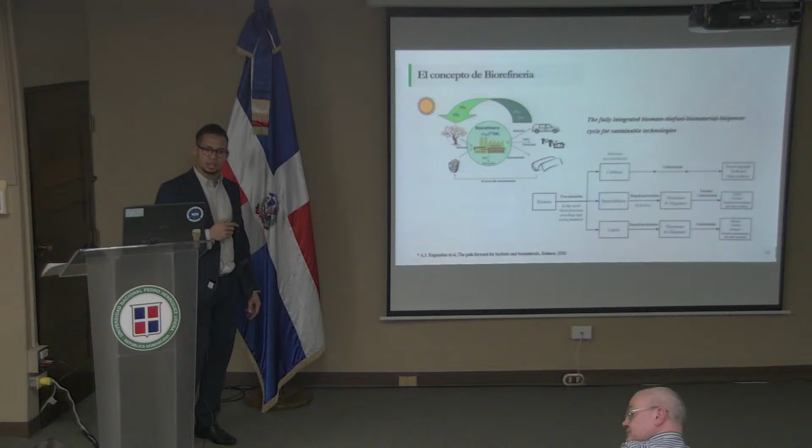Pero lo que sí es un hecho es que la contaminación que provoca esto está pasando. Por ese motivo los sectores industriales, academia e investigación están buscando formas de no ser tan dependientes de esta economía, de buscar alternativas para producir esos combustibles y materiales de la misma forma en que se producen a partir de recursos petroleros.

Un concepto muy interesante es el de biorefinería. Quizás algunos están familiarizados con él o no, el cual es análogo a lo que es la refinería de petróleo. Usted coge recursos, en este caso recursos naturales, los fracciona en sus componentes, y estos componentes son convertidos a productos de valor agregado y a combustibles. Es prácticamente análogo, es prácticamente lo mismo.

Ahora, ¿cuál es la mayor diferencia? Aquí hay un ejemplo de biorefinería, el sistema de pirólisis. Y solamente para resumir, esto es lo del concepto de biorefinería.

Antes de hablar cuál es la principal desventaja ahora mismo en la conversión de biomasa, vamos a hablar un poco en detalle de la biomasa y su composición. Quizá ya todos ustedes saben que la biomasa lignocelulósica está mayormente compuesta de celulosa. El porcentaje en el cual están presentes la lignina, la hemicelulosa y la celulosa varía según la fuente.

Pero tiene muchísimas ventajas, como son renovables, abundantes, no tóxicas, y los productos que se generan son biodegradables. Si se produce plástico a partir de aquí, será biodegradable. También hay un porcentaje de extractos, los cuales también tienen importantes aplicaciones.

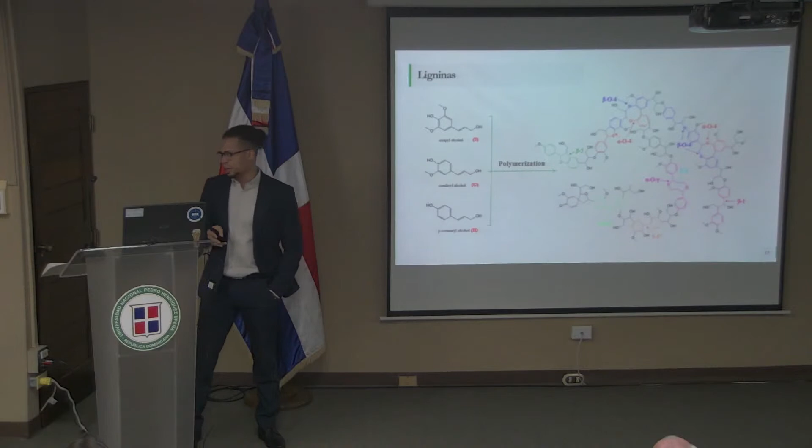Vamos a mirar uno por uno. Si se quiere valorizar lignina, lo primero con cada uno de ellos es la extracción, se deben extraer, pero después hay sucesivas etapas para obtener los monómeros. En el caso de la lignina es un polímero bastante grande, pero se han identificado varios monómeros, los cuales son principalmente alcoholes fenólicos.

El primer paso después de la extracción es depolimerizarla. Existen varias rutas para depolimerizarla. Y una vez que se obtienen estos tres monómeros, estos se pueden valorizar a productos de valor agregado o a combustibles y materiales.

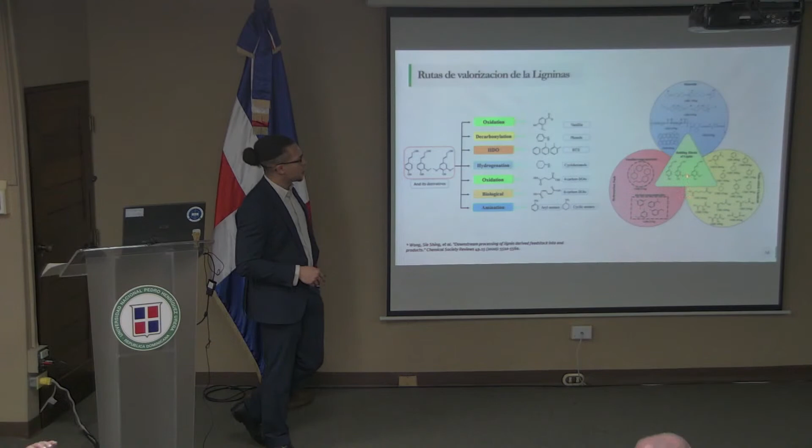Aquí pongo un ejemplo de las diferentes rutas a través de las cuales se pueden valorizar estos monómeros obtenidos a partir de lignina. Vemos algunas de las reacciones que se pueden realizar y algunos de los productos que se pueden obtener, los cuales están agrupados como materiales, combustibles, ya sea combustible de avión o moléculas tipo gasolina, y varios productos de valor agregado, ya sean productos químicos finos o productos con un mercado en específico.

Lo mismo va con la hemicelulosa. Aquí vemos que la hemicelulosa igual es un polímero, pero está compuesto principalmente de azúcares. Algunos de los azúcares que se pueden encontrar en la hemicelulosa. En este caso, lo primero sería extraerla de la biomasa, y luego de la extracción viene la depolimerización.

La depolimerización de este polímero permite encontrar azúcares como glucosa, manosa, galactosa y xilosa, y estos pueden ser convertidos igual a materiales y combustibles. Aquí vemos un pequeño esquema de cómo esto se hace: la hemicelulosa es convertida a estos azúcares mediante hidrólisis, la cual puede ser enzimática o ácida. Y algunas de las reacciones que se pueden realizar con estos azúcares para obtener diferentes productos de valor agregado.

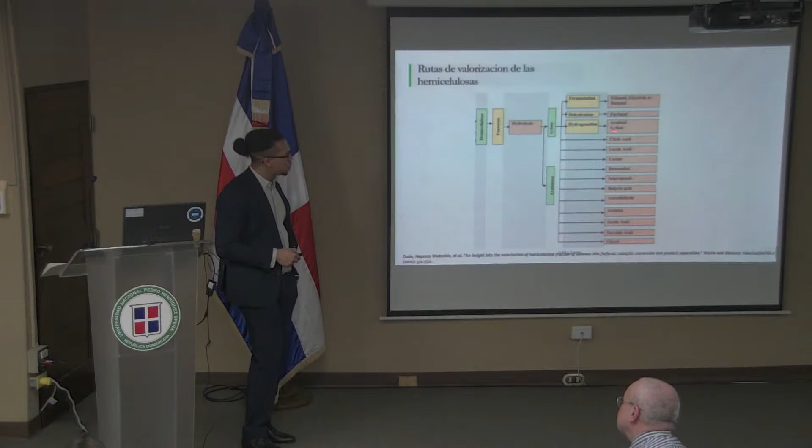Lo mismo con la celulosa, ustedes conocen la glucosa. Prácticamente la celulosa es glucosa, no más. Y lo mismo, hidrólisis primero, y luego de la hidrólisis, cuando se obtiene la glucosa, esto también se puede transformar mediante diferentes tipos de reacciones químicas a productos de valor agregado y combustible, los cuales tienen muchísimas aplicaciones en el área, por ejemplo, de la farmacéutica, de alimentos, etc.

También existen los extractos, los cuales son principalmente compuestos simples que se pueden extraer mediante extracciones con solventes. Por ejemplo, ácidos grasos, proteínas, pectinas, azúcares simples, compuestos fenólicos, etc. Y estos compuestos fenólicos, ácidos y también azúcares pueden ser valorizados de la misma manera como les estaba hablando de las diferentes fracciones de la biomasa.

Y si la biomasa es tan buena, si ustedes pueden hacer todo esto, ¿por qué no lo hacen? ¿Por qué todavía estamos haciéndolo con fuentes de petróleo? Bueno, el problema actual es que existen muchas limitantes. El principal de ellos es que los procesos son bien conocidos, cómo se hace, pero no son eficientes si se comparan con los procesos a partir de origen petrolero. Entonces, por eso es que hay un gran esfuerzo en investigación en esta área, porque se quiere mejorar todos esos procesos, hacerlos eficientes, y reducir esto.

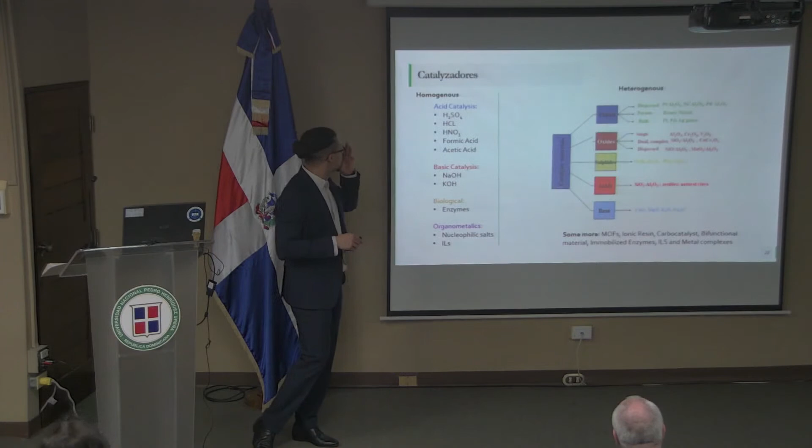Bueno, antes de seguir, quiero hablar sobre algo. No sé si estoy dirigiéndolo bien al público. Yo no, porque soy egresado de la UASD, no sé cómo ustedes están familiarizados con lo que es catálisis. Tranquilo, ellos son estudiantes, todo lo que se haga son estudiantes de ingeniería. Pero en la UASD, por ejemplo, cuando yo terminé mi carrera, escuché un poco de catalizadores, pero no sabía realmente qué era un catalizador, cuáles eran, cómo se clasificaban, cómo se veía uno. Yo nunca vi un catalizador, mi hermano, hasta después de terminar mi carrera. O sea, vine a ver un catalizador cuando empecé a trabajar en catálisis.

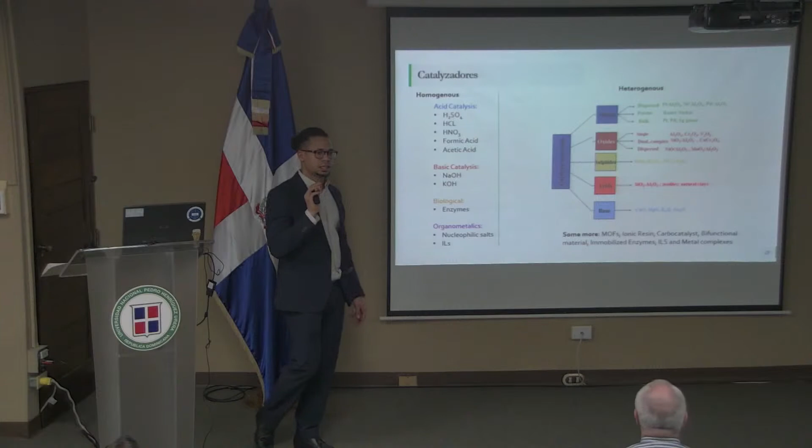Existen dos tipos de catálisis, homogénea y heterogénea. Esto yo creo que es conocimiento básico. Dentro de la homogénea vemos algunos tipos de catalizadores que se usan. Nuestro laboratorio está más enfocado en catálisis heterogénea, porque trae beneficios en los procesos de separación, hace las separaciones más fáciles y permite pasar a la operación continua de manera más fácil también.

Y así reducimos etapas también, mediante el uso de catalizadores heterogéneos. Ahora, si fuéramos a hablar de catalizadores heterogéneos, aquí vemos algunos de los clásicos en catálisis heterogénea, como son los metales, los óxidos, los sulfuros, catalizadores ácidos y básicos. Mayormente estos catalizadores heterogéneos son sólidos. Puede haber algún caso para otro tipo. Algunos un poco menos clásicos, menos convencionales, que son bastante investigados últimamente.

Tenemos las estructuras organometálicas, resinas iónicas, compuestos de carbono, materiales bifuncionales, y también existen técnicas para inmovilizar catalizadores homogéneos, por ejemplo, enzimas, líquidos iónicos y algunos complejos metálicos. Se pueden inmovilizar en sólidos y ahí usted tiene un catalizador que es prácticamente lo mismo que el homogéneo, pero en un sólido. Y ahí ya lo tiene heterogéneo.

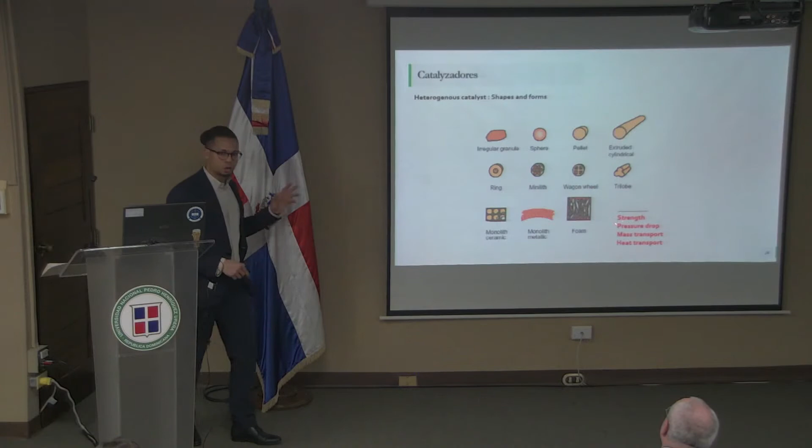Bueno, aquí vemos algunas de las formas en las que vienen los catalizadores. La forma confiere lo que es fuerza mecánica, las caídas de presión dentro de los reactores, y controla los procesos de transferencia de masa y de calor dentro de los reactores, dependiendo de la forma que tenga el catalizador.

Yo no sabía que los catalizadores se podían ver de todas estas formas cuando terminé mi carrera. Ahora, con el enfoque de la ingeniería de las reacciones químicas, cómo investigamos los procesos a partir de la biomasa utilizando catálisis, existen varios puntos. Si yo voy a investigar X o Y reacción de la biomasa, digamos que voy a investigar hidrogenación de azúcares, por decir algo.

Algunos de los puntos que investigamos, primero, está el tipo de reactor. Usted va a seleccionar qué tipo de reactor quiere, en qué tipo de reactor es más conveniente estudiar esta reacción. Eso va a depender de muchas cosas, de la velocidad de reacción, de qué catalizador, etcétera. Pero muchas veces ya tenemos conocimiento previo de estas reacciones o nos apoyamos en la literatura, porque los esfuerzos científicos se basan en esto. Hay muchísima literatura sobre un tema y usted no va a publicar lo que ya está publicado. Usted va a empezar de un punto siempre.

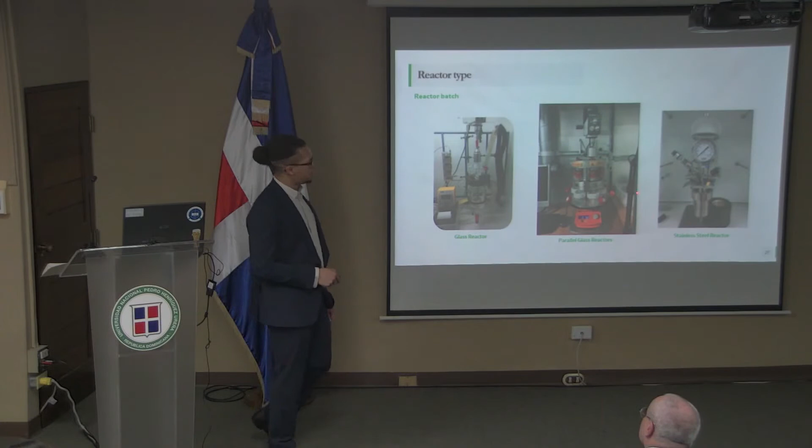Esto le permite a usted ahorrar tiempo, poner 6 catalizadores o 6 diferentes condiciones para estudiar equilibrio. Y bueno, tenemos los mismos reactores tipo batch, en este caso en acero inoxidable. Este tipo de reactor aguanta mayores temperaturas y mayores condiciones de presión. Aquí puede ir a presiones de, bueno, depende del proveedor, pero creo que son algunos 60-80 bares máximo.

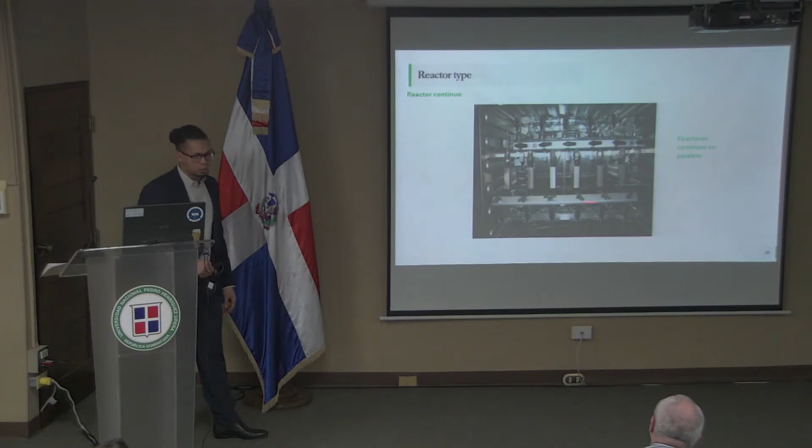También tenemos reactores en paralelo, en continuo, de la misma forma que teníamos en tipo batch. Y una tecnología un poco menos convencional, tenemos microreactores también, los cuales le permiten a usted estudiar las reacciones químicas en el régimen cinético, eliminando los fenómenos de transporte, y le permite tener una idea de cómo las reacciones pasan sin esos fenómenos.

Otras tecnologías no convencionales que utilizamos en nuestro laboratorio son reactores a microondas y reactores a ultrasonido.

Y bueno, hay que seleccionar el tipo de reactor y eso va a depender mucho de la reacción que se vaya a usar. Hay que saber qué tan rápida es la reacción. Si la reacción es muy lenta, es mejor utilizar un reactor tipo batch que uno continuo. Pero si la reacción es muy rápida, es mejor utilizar un tipo continuo. Y así, también se debería uno apoyar un poco en la literatura o en conocimiento previo para saber ese tipo de cosas.

Después de eso está la selección del catalizador. Todo buen catalizador tiene que tener tres condiciones básicas: tiene que ser activo, tiene que ser selectivo y tiene que ser estable. Activo quiere decir que sea capaz de operar en esta o en aquella reacción que yo quiero estudiar. Selectivo quiere decir que me permita obtener el producto que yo quiero en altas proporciones. Y estable quiere decir que yo puedo utilizarlo más de una vez sin que su tiempo de expiración llegue muy rápido.

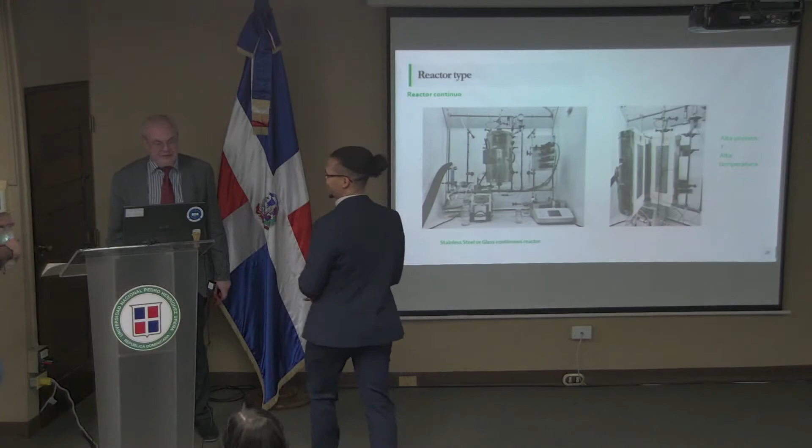10 minutes. No, we have many pictures and videos. Yeah, pictures to show that we came to work and not to relax. You mean that we stay here for photography now, like that? Next to the flag, so we can be seen.

It was interesting. I think it was good that people asked you all those questions here. They're insightful for the students, actually. Yeah. Should we place Madame the Dean in the middle? Yeah.

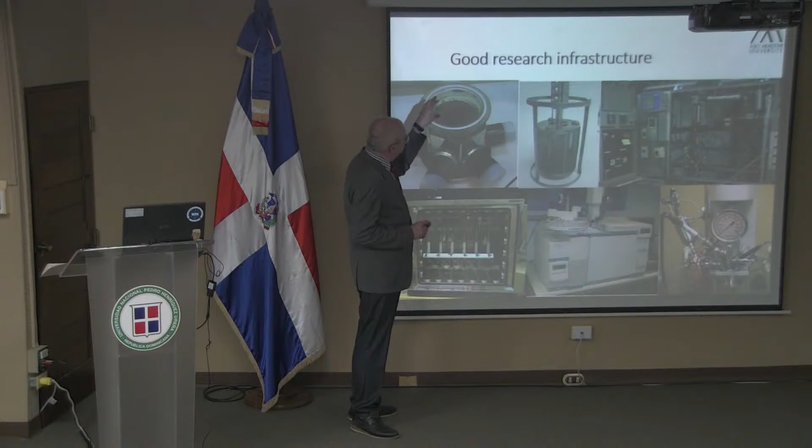Now we can go to the scientific topic towards new reactors and catalysts, where I try to explain in a methodological way what we are doing.

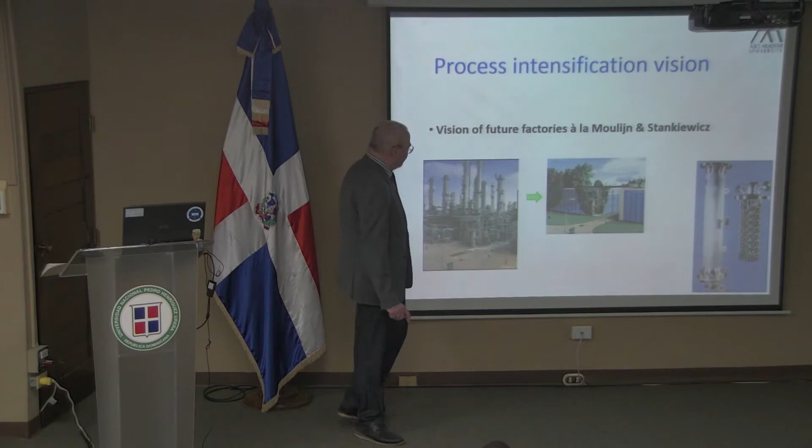But in future, if we manage to do process intensification, we can have much smaller factories and devices, and then one part of this industrial land can go back to people or even back to a natural state. Oh yeah, that is a dream.

But in any case, it has these different aspects, and we can separate two things: process intensification methods and process intensification equipment. Of course, there is interaction between these two. Wander showed things like ultrasound, microwave—these belong to methods. Intensification equipment is, for example, the microreactor, which Wander also showed here.

So there are numerous methods to do it; one must focus on something. We have ultrasound and microwave mainly. Then there are things like reaction and separation, such as reactive distillation. Then we have supercritical conditions, for example unsteady state operation. But bottom line, it's not about trying to make miracles—behind all this is the idea of enhancement of mass and heat transfer in one way or another.

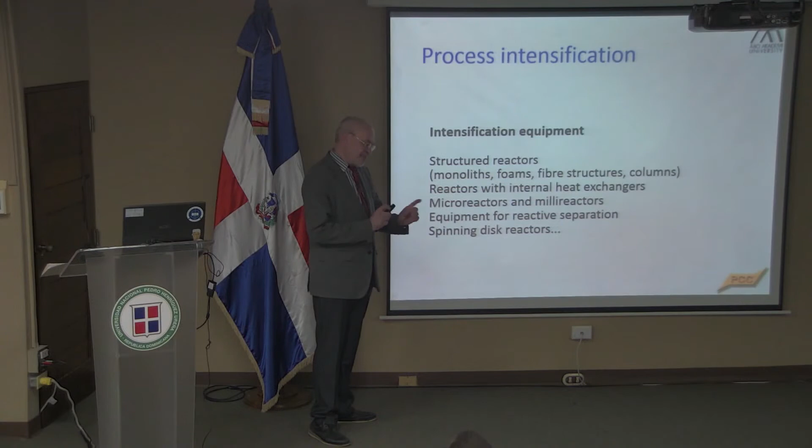Intensification equipment includes this monolith foam, which was shown here by my colleague, also micro and milliscale reactors—I will show more about them. And of course equipment for reactive separation, like reactive extraction, reactive distillation. So the method and the equipment are married with each other. So I will call it more like reaction intensification—one part of process intensification, focusing on chemical reactions and chemical reactor structures.

Now here we can have batch operation, we can have continuous operation—that's always the basis. But then the next step is of course to try to make it very efficient. Here, why do this in parallel? It's actually not necessarily process intensification, it's intensification of experimental work. You can put 6 different temperatures, or 6 different catalysts, or 6 different flow rates. Then you do much more experiments per day than with a normal device where you have only one tube.

This is handmade in our lab. Lavender had the picture of our very skillful laboratory manager, Dr. Kari Eränen, who constructed it after common discussions.

Catalysis—what is catalysis, and who was the father of catalysis? The father of catalysis was the world famous Swedish chemist, Jöns Jakob Berzelius.

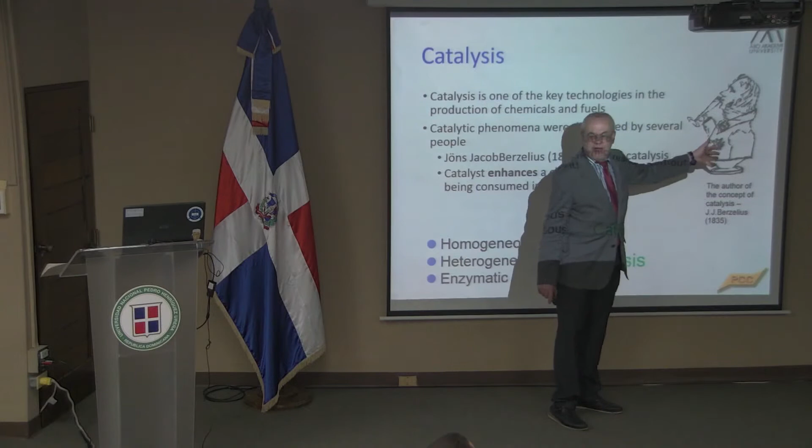Then you might ask, what is this? Berzelius was drawing a self-portrait after having some partying in Stockholm. So that is his picture of himself. You can go to Stockholm and find a park named after Berzelius. You just need the flight ticket.

Later on, people understood it more deeply, that we have homogeneous, heterogeneous, and enzymatic catalysis. That definition was more or less given first by the famous chemist Wilhelm Ostwald.

New catalyst forms: monoliths, like for cleaning exhaust gas from cars, but also industrial applications like oxidation reactions, microreactors, fiber, cloths, solid foams. I will tell a little bit about all this now in this lecture.

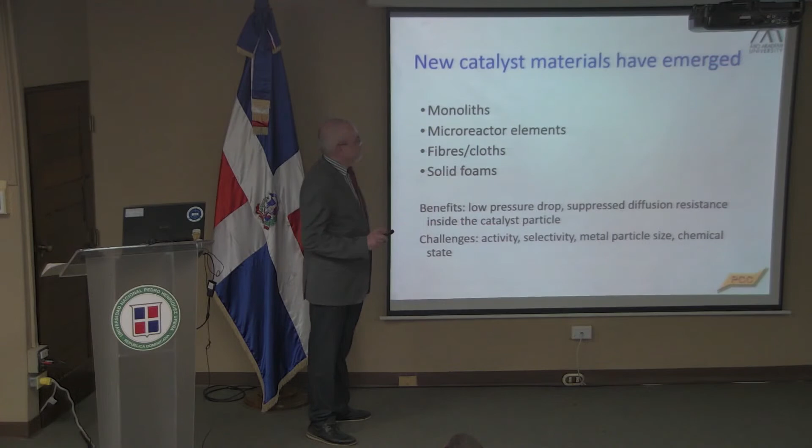Katapak. If you want to lose your money, you order a Katapak. It's made in Switzerland. What is the idea?

It's a network, a very nice network. You send your catalyst there - you can even prepare it yourself - and they put the small particles inside the network here, and then they are immobilized. Then the gas and liquid can penetrate into the network, and in that way you have an efficient reactor and a static mixer.

Monoliths, I think, are probably known to many of you. They can be metallic or ceramic, with channels of a few millimeters. Here is the material, here is the porous support, and then the active metal spots are in the pores, and there, hopefully, the reaction is happening.

This is a marvelous example of Finnish handicraft, knitting, from the Tampere University of Technology - a silica fiber that can be immersed in a metal ion solution, and you can get platinum on it. It's a structured catalyst.

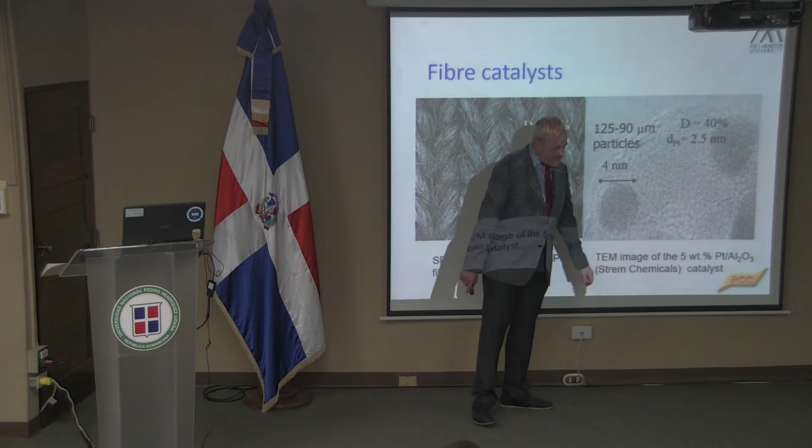Then you need to run to a microscope. Transmission electron microscopy can give a picture of things on the nanoscale. So here the metal spots are approximately 4 nanometers. That can be critical, particularly for one metal - gold must have very small spots, like 2 nanometers or a little more, to be active. If they are very big, then it's inactive. But also for different other metals, it's important to know this particle size in order to optimize the conditions.

Now here you have again this nice fiber in a scanning electron microscope. It's a good support material, but it is a little bit weak. What is the English word? Brittle. You can crush it by hand, and that's not very good.

Now let's go a little bit into the theory. Very many processes are three-phase - you have gas, liquid, and solid catalyst. For example, with sweeteners like xylitol and sorbitol, you have the sugar solution in water, you have hydrogen, and you have the solid catalyst, ruthenium or nickel. So you inevitably have three phases.

Then you have the solubility and mass transfer - gas to liquid, liquid to solid, and mass transfer and reaction inside the particles. So this is a lovely case, a dream for a chemical engineer who wants to do modeling. You must model this one, and this one, and this one, and then put all these sub-models into the model of the reactor concerning the flow pattern and energy balance.

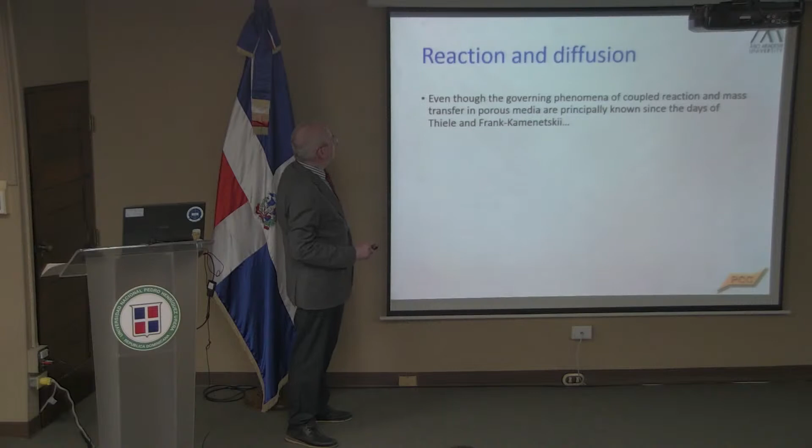Reaction and diffusion in porous catalyst particles is principally known because before World War II, in 1939, Thiele from Northwestern University, United States, published what is called the Thiele modulus, giving the ratio between the rate constant and diffusion coefficient. But this concept is not that much used for complex organic systems, for example in biomass transformation, yet. So the basics, the first order reactions, are present in standard literature, but that's not enough. One needs also to go further.

Who was Biot? He was a French physicist who made a theory between the external and internal mass transfer, roughly speaking. He was an expert on heat transfer, and then mass transfer is similar.

Without going deeply into the background, what do we have for a porous catalyst particle as a mass balance? We have the chemical reaction rate and the diffusion rate, which are interplaying, because the molecules must go from the film outside the particle to the outer surface of the particle and diffuse there in the pores, adsorb on the surface, react on the surface, go out from the surface, diffuse out through the pores and to the film. That's the path.

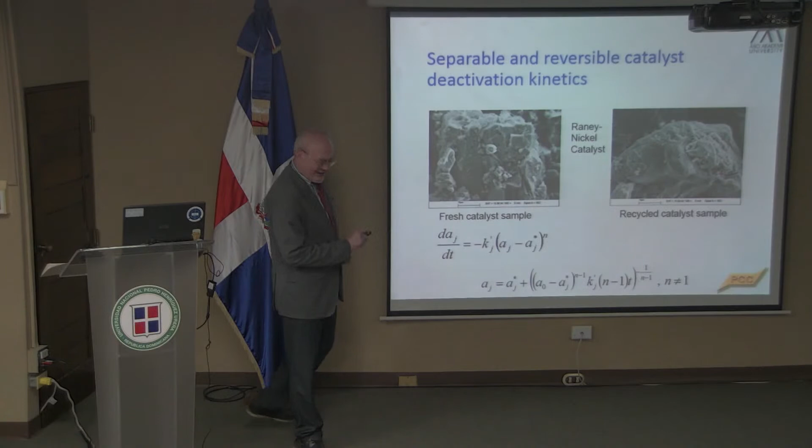So by solving this with software, which my colleague mentioned, like MATLAB or gPROMS, we get the concentration profile inside the particle, inside the pores. There is only one problem: we need to know quite many parameters.

Then there are some other things. If we do it in the batch reactor, this is the balance: transport to the particle and transport from the gas phase—for example, if you have hydrogen, you need this. And then gas-liquid flux can be described with the classical two-film model. I won't go into the details—it's just proportional to the difference in gas phase concentration and liquid phase concentration.

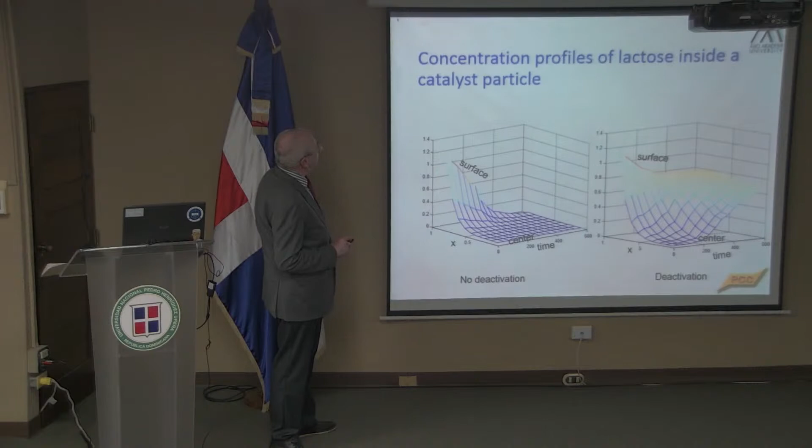So this type of simulation is not used only like art pour l'art to make nice publications and get fantastic doctoral theses. They can be used for design of catalyst particles in industrial scale, and they can give an indication of whether we need this modern structured catalyst, or can we survive with classical pellets. You can convince other people by doing these three-dimensional pictures of the same thing, but it's actually the same issue as the previous picture. That's the point.

Now, continuous reactors: of course, industry typically has the dream of continuous operation, particularly in bulk chemicals and oil refining, etc. So then we have the workhorse, which is the trickle bed reactor, where we have the downflow of the liquid and gas, and the particles are there. And why is it called trickle flow? Trickle is a verb in the English language, which means some kind of dropping down.

I was at a conference where an American professor had put a microphone in the reactor. He could hear that it was trickling. It was like bloop, bloop, bloop, like this. Yeah. Now, this is of course clear what we have there.

Something is in the gas phase, something is in the liquid phase. We have the diffusion effects, we have everything I showed in the principal pictures. So this is in principle very, very demanding to model. Not necessarily on the level of equations, they are quite well known, but really to implement it and to have reasonable values for all the parameters. So we are back to this picture.

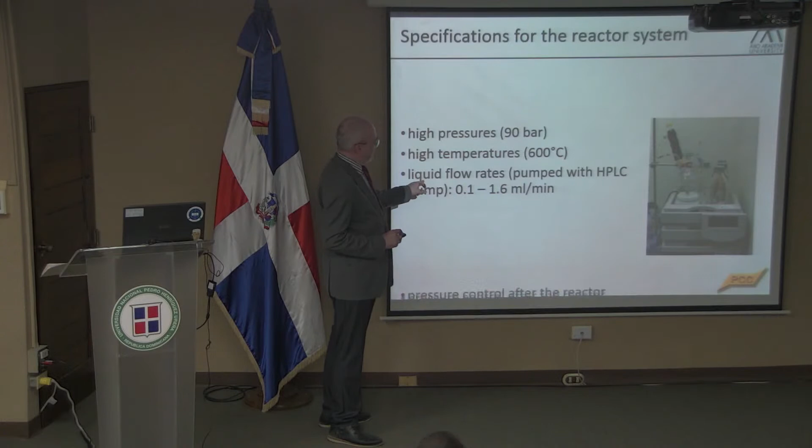This is the basic unit, one reactor here. You see, the catalyst is there, and this is a heating block of aluminum outside it. So we can have different temperatures in different parallel reactors. It can go to rather high pressures and high temperatures for catalyst pre-treatment, and we can adjust the pumping rate. So this is just a technical summary. And we can screen catalysts and temperatures in parallel. We can also look at catalyst deactivation.

Here is an example of this citral. The catalyst is nickel on silica. Nothing special, the temperature is quite low, the pressure is also moderate. Yeah, just go ahead and do it. Here is the full scheme. But on nickel, it goes this path to citronellal and citronellol.

Yes. What can we see? That if we had the same pumping rate in all parallel reactors, we should get more or less the same result. So this should be 1 point, 1 point, and 1 point. Yeah, it is within reasonable scattering. But what you see is that with time on stream, the tendency goes down. That means conversion is going down, so the catalyst is deactivated.

So we can directly see it like catalyst activity testing. And that is of course something industry is doing very much. When they screen new catalysts, they must see how long it resists, how often it must be changed or regenerated, etc.

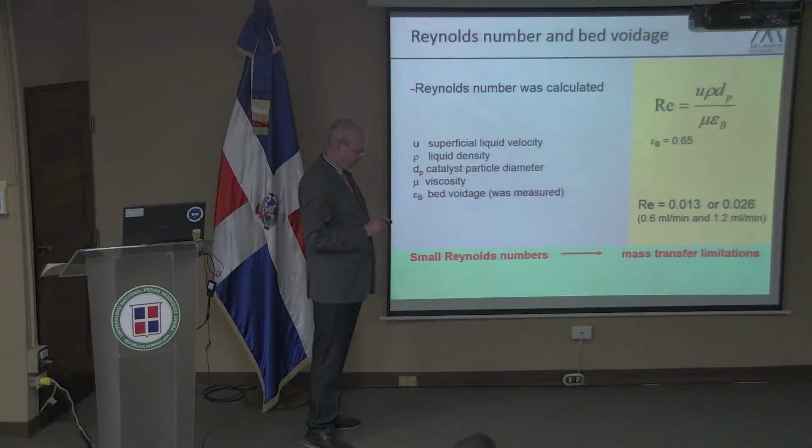Now we come to chemical engineering again, and we must evaluate the Reynolds number here, and you might be surprised. But in this type of system, for this reaction, we must have a low flow rate. So Reynolds is really, very, very low. Then residence time, of course, affects it. If we have a shorter residence time, then we have lower conversion. It's illustrated here. That's nothing surprising, but it shows that we can also check this quickly.

I'll take the next picture, which is more important. I was talking about diffusion in the pores. We tried 2 catalyst particle sizes. We put in big particles, in a relative sense, and we have low conversion because of diffusion resistance. We put in smaller particles, and we have much better conversion. That means we can directly study the catalyst effectiveness as a function of particle size in this device. You can of course compute a lot, but it's always better to also have some experimental evidence and verification.

So I would say that this is successful, but what we learned is that we should have longer reactors, because many reactions are slow, so that we can have a higher flow rate, also to suppress the external mass transfer resistance. And we can prove the diffusion resistance, we can see the effect of residence time, particle size, temperature, activity changes, so it's a very practical tool.

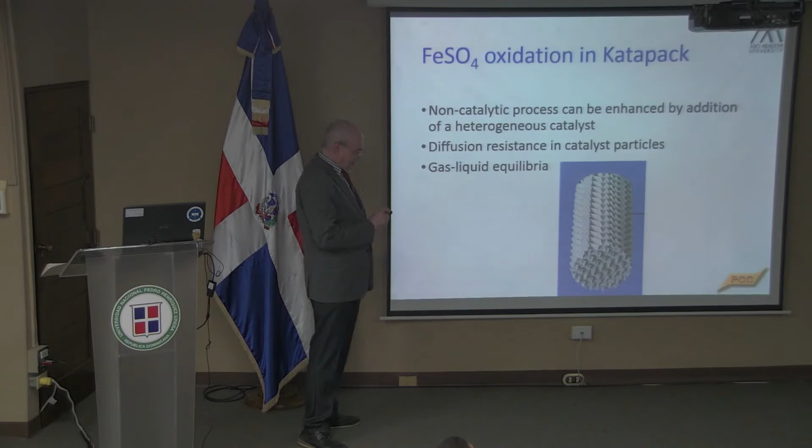And then the company who paid it bought this Sulzer and made pilot test. Non-catalytic rate, there is mechanism behind, but you see it's proportional to ferrum ions here. Close to second order, a little bit less. Catalytic one, a complex surface reaction mechanism, and the reaction order was practically first order with ferrum, but 1/2 for oxygen.

There is of course a lot of work behind this to do experiments and modeling, regression analysis like my colleague told, to get these parameters. But then we have a nice possibility to simulate and compare with oxidation experiments. So this is batch reactor experiments actually, or actually semi-batch, so that we have the oxygen concentration constant, and we do at different temperatures. Lines are by simulation reasonable. And then also here we could show that catalyst particles have diffusion resistance. So we should not have too big catalyst particles there.

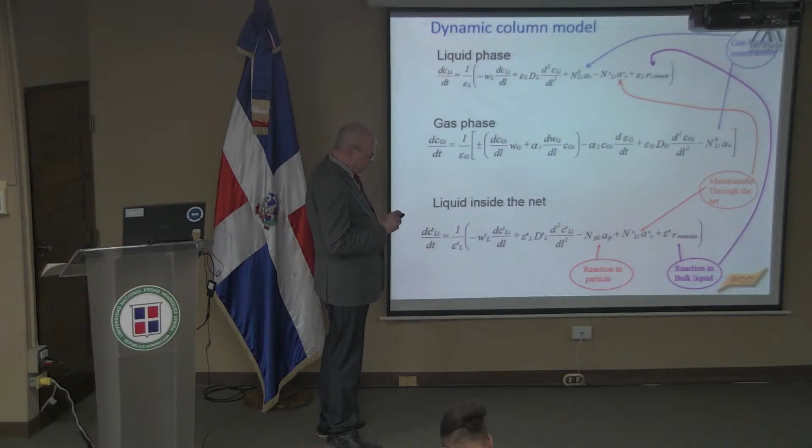Okay, then we go to the more advanced model to describe this Katapack column, where we have the particles inside and we have mass transfer between gas and liquid, like indicated here. We have mass transfer inside the net system. We need the liquid phase balance, gas phase balance and liquid phase balance inside the net. So this is bottom line what we have and can be put there.

And then it was built like a recycling system, a column reactor with the catalyst and recycling the liquid like this, in the company Kemira, which is making water treatment chemicals, and we could make an independent simulation and verify with our model in the lab scale that it can describe the behavior of the pilot reactor like this. The concentration of ferrum iron 2 goes down and builds iron 3. And then we have this concentration pattern in the system, profiles inside the reactor as a function of time.

So it goes. I would say that this is a rather successful work, and I think one can learn something as a project how it could be put up. We have the non-catalytic experiments with only oxygen or only air, and we have the model of the non-catalytic kinetics. We have the catalytic experiments where we must combine the non-catalytic model with a catalytic model to a comprehensive kinetic model having both elements.

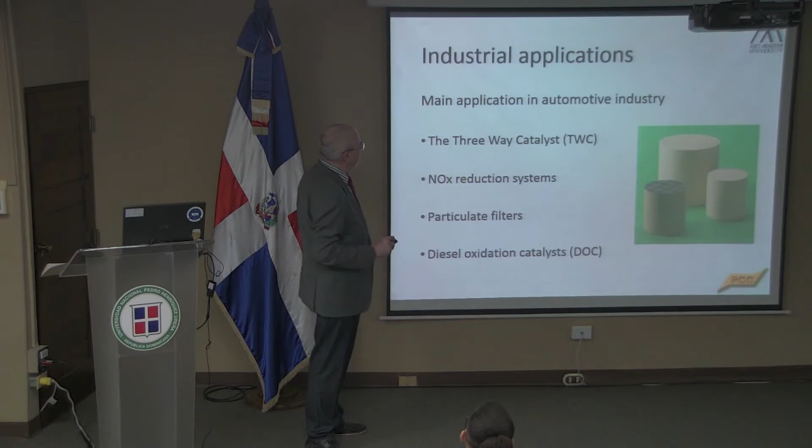Yeah, but also it can be used for NOx reduction, and it can be used, for example, in destruction of volatile organic components which appear like in paint industry and here and there. You cannot let them slip in the atmosphere. It can also be used successfully, metallic monolith, if you have highly exothermic reaction. You avoid the hotspot, you keep better the temperature under control. So here is like stationary emission control, where you put the monolith layers on top of each other.

Yeah, here are potential reactions where I think one would really have a benefit. Hydrogenation of nitrobenzene, for example, is heavily exothermic. Also, oxidation of orthoxylene to get phthalic anhydride. These type of partial oxidations, which are heavily exothermic and dangerous ones, would better be performed on monolith. Now, why then not use it? Yeah, monolith is more expensive than catalyst particles.

I had a project together with the famous Danish company who is doing a lot of catalyst technology. I proposed monolith. It would have been good for that application from chemical and technical viewpoint. They said, no, Tapio, we don't put monolith. I said, why? We want to have such a catalyst that we can throw it into the reactor. Monolith you must put nicely there. Yeah, no.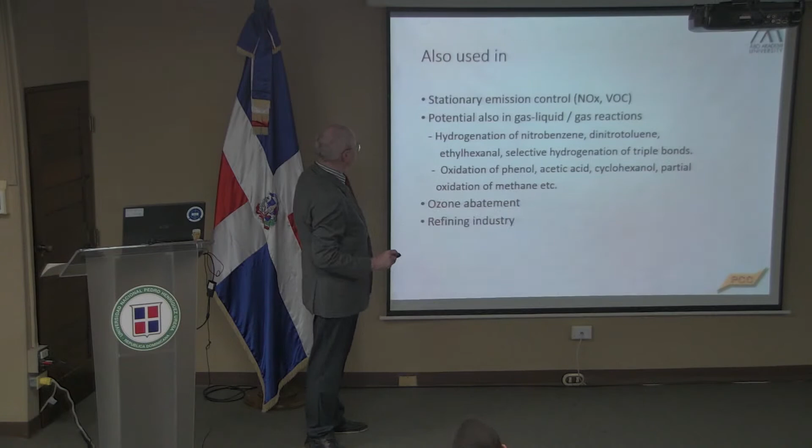Let's go further. This is just a list of potential applications. Work is going on here and there. But why to use them? Low pressure drop. Catalyst is fixed in its place. We can have large geometrical surface area. And we can tailor the detailed design.

One can also say easy scale up, in the sense that when we have a small scale monolith, we have exactly the same catalyst there, same catalyst layer, etc. We have short diffusion path, so you don't typically need this model of reaction diffusion. You can try to operate in the regime of kinetic control. For three-phase systems, there is still very little experience, and there the challenge is to distribute gas and liquid in larger monoliths in an even way.

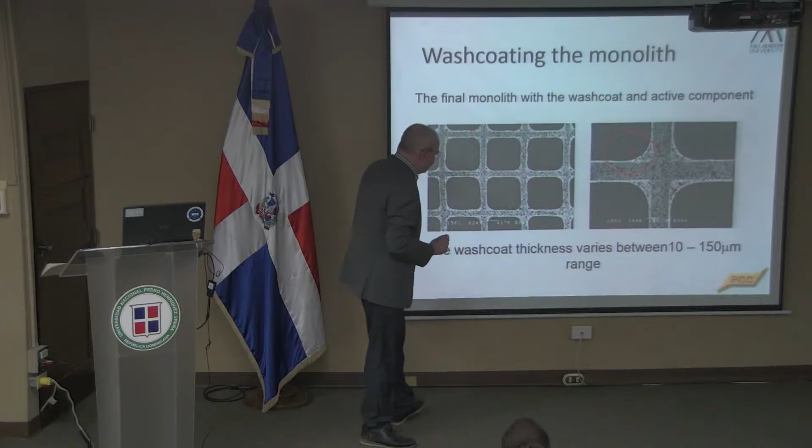I think I could jump over this preparation technology. I will leave the slides here so you can study them in peace, but bottom line, if you have the support material there, then you can make the active component there by impregnation of a metal salt. That's the key point. It's a wash coating method. The result will be this type of nice wash coat, but you see, it is difficult to have it completely even. Typically here in the corner you have more wash coat, you have thicker catalyst amount. So that's of course a tricky issue in practical work.

Here I have the example of the metal monolith which you roll like that, and then you have a very nice and compact structure and very good mechanical strength. So we can go further to solid foams. This is ceramic foam, and why use it? We can randomize the liquid and gas flow. In a monolith, there's the risk that it's not distributed evenly when you have a larger monolith. But here we can hope that when we have a dispersion of gas and liquid and we push it in, it's randomized in the structure.

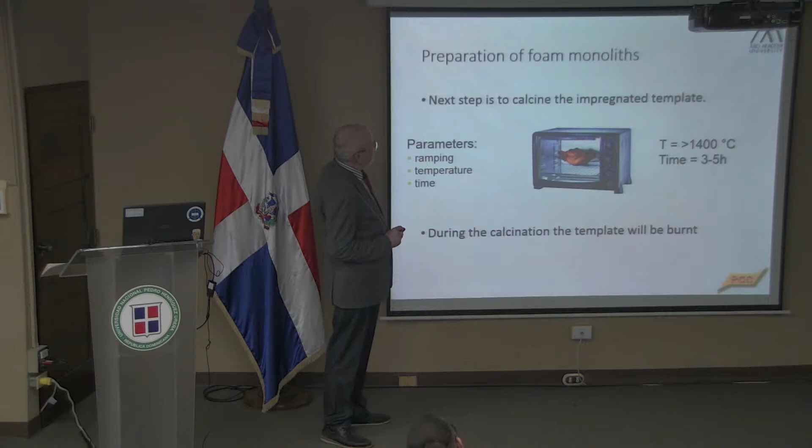Here, the preparation is you have polyurethane, for example, as a template, and then you put the inorganic component there and you burn away this polyurethane. So then you get a replica, which I showed in the picture here. And then you can play with the different components here, what you want to put. The whole idea is of course the dipping, but we can take advantage of all the previous preparation of different catalyst materials, because chemically it's the same as traditional catalyst powder. Then there must often be some calcination in an oven or with microwaves. Different possibilities exist.

Foam monoliths here of ceramic structure, then you must go to the scanning electron microscope to see the whole system and the channels there. The real size of these pieces is approximately like my finger. Then you go to some expert who can do this tomographic investigation. We collaborate with the Helmholtz Zentrum in Dresden-Rossendorf in Germany, and there is an expert who can look at the monoliths and make these nice pictures, and also study the flow into the monolith. But then we also need a very classical determination of residence time distribution through this system.

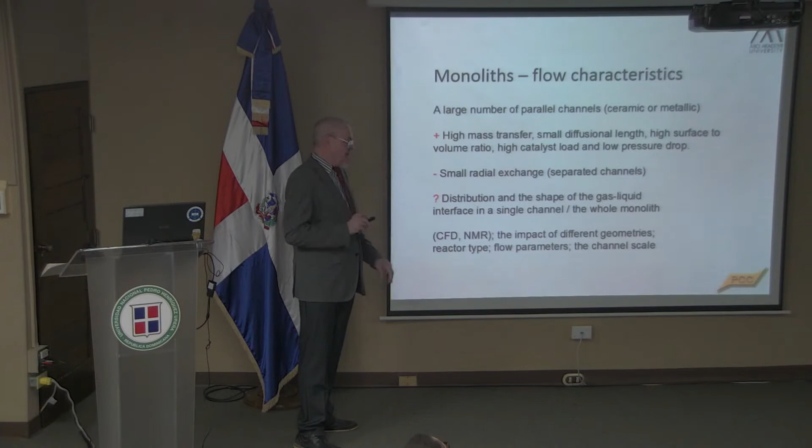Yes, I think this all is something which must be done, and there is no shortcut. All these studies are very useful, and they are important when we try to shift to a new technology. High mass transfer, short diffusion length, high surface to volume ratio, low pressure drop are great benefits. Distribution of the gas and liquid is the challenge, and of course this is typically a more expensive catalyst. So if you have catalyst deactivation, there is the risk that you must throw away the monolith and then have a new monolith.

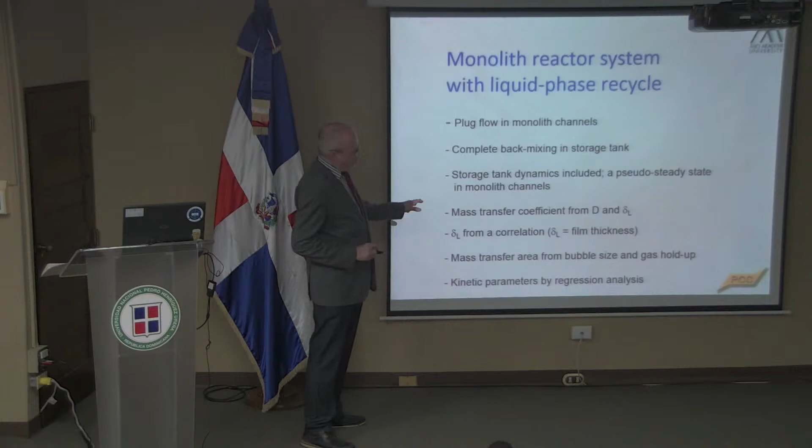And we assumed the flow to be simple. The storage tank was a completely mixed reactor, continuous tank reactor. Then we could calculate the layer thickness there, the film thickness around the particle, from correlations in literature. A lot of pioneering work on three-phase monoliths was done in Gothenburg, Göteborg in Sweden, and then later on in Delft. So we could utilize this information and methodological research made by our colleagues in Sweden and in the Netherlands.

Yeah, I think I can conclude here that this mass transfer resistance requires a lot of consideration. Optimization of reaction conditions is very crucial for everything. We would need more applications, particularly for fine and specialty chemicals, also in biomass. Nowadays, the loop reactor concept can be used by recycling to get higher conversion. Rotating monoliths are used in stirred tanks in laboratory scale.

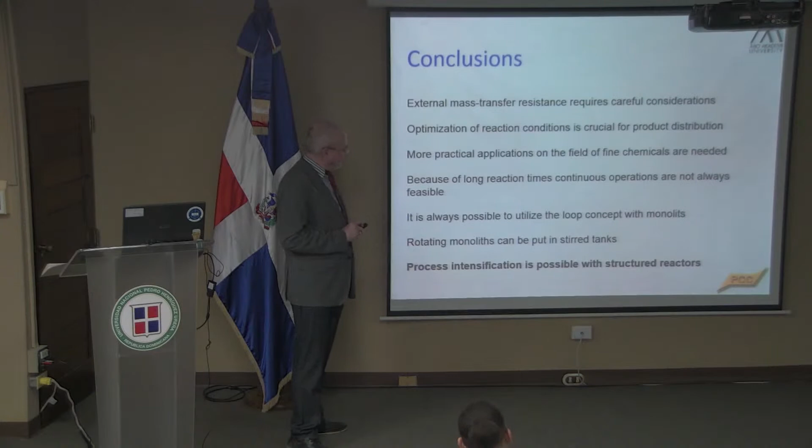In general, different types of process intensification are possible with structured reactors, but one should always have a sound, how to say, comparison and research strategy, which I present here. The basis is the kinetic investigation, knowledge of the physical properties. This gives the model for intrinsic kinetics I have shown. We get a model for catalyst layers by combining intrinsic kinetics and a diffusion model, and then we can try to decide after experiments and simulation, should we have a classical slurry reactor, or a classical fixed bed, trickle bed, or a structured reactor like monolith, solid foam, fiber, whatever.

Should we take a break or should we continue directly? But actually, I don't have that much left. We could continue until the bitter end.

Yeah, because this is something newer, avant-garde again. A variable area bubble column reactor, where we have a PhD student now, Ananias Medina, but before him the project was prepared by some people. Former PhD student Cesar de Araujo Filho studied the classical bubble column reactor. Javier Ibanez Abad came from Spain and made a postdoc study of this one.

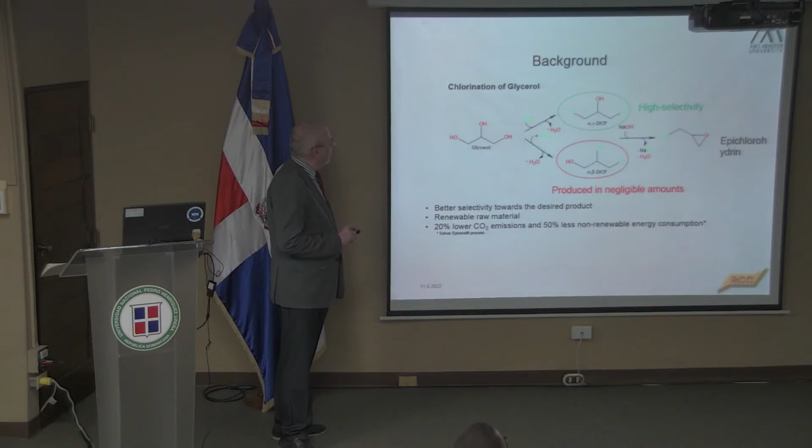So, let's go further now. Background is this, then, that we get first the monochlorinated product, which gives the two dichlorinated products. But if it's this one, which is chlorinated, this beta component cannot react further. Main path is here. Goes here, monochlorinated and alpha gamma. And you see, catalyst is simple, it's acetic acid. HCl is simple. Everything is principally simple, but we must get it reacting and we must understand the reaction mechanism.

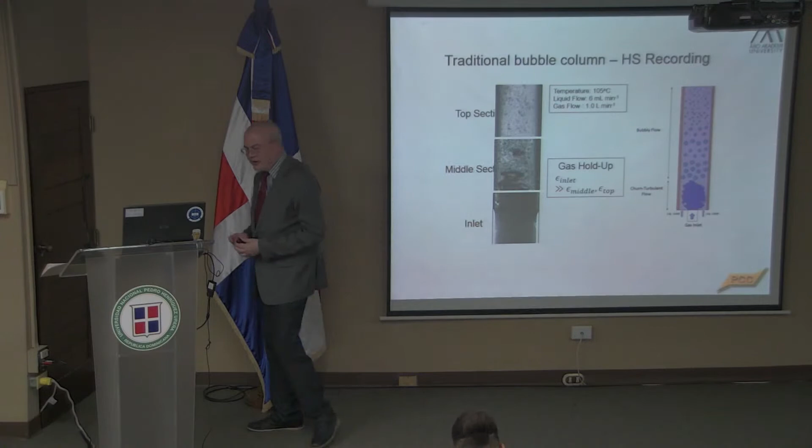Okay, but let's try to go now to a traditional bubble column reactor. We have a high-speed camera, and in the inlet it's like that. Then the hydrogen chloride bubbles coalesce, but then hydrogen chloride is consumed. So in the top section we have again a different flow pattern. Quite interesting. We have different flow patterns in different parts of this system. Then we need traditional residence time distribution. We put an inert molecule there, a pulse, and we see how it comes out. If this is very narrow, we have Dirac's delta function and plug flow, piston flow, but here we have a broadening. So we have some back mixing in the system. Yes.

Variable column reactor. Why? Because we want to have segments here to promote plug flow to get better performance. Because in a traditional bubble column there is quite a lot of back mixing, which is not good for this type of reaction. So here are some experiments. Residence time distribution is here, and then here is the fit of the model to the experimental data by Javier Ibanez. The same picture more or less repeated. Yeah, it works.

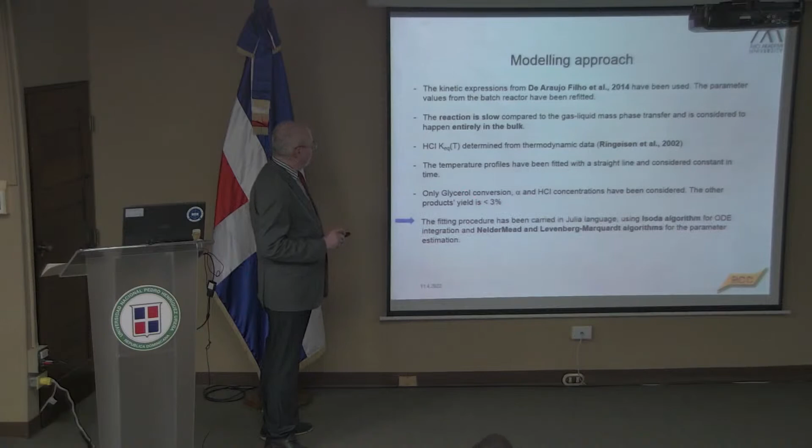And then we need the kinetic expressions from previous work. We have data about the phase equilibrium of HCl, and then we utilize the experimentally determined temperature profiles. And then the Julia language was used for parameter estimation. Here you see the model is the so-called dynamic time-dependent axial dispersion model: plug flow, axial dispersion, gas-liquid mass transfer, and reaction. The rest are smaller details. So, discretization of the partial differential equations in the length coordinate, then we have a system of time-dependent ordinary differential equations, and we fit some of the parameters by minimizing the difference between the experimental and the predicted concentrations. Oh, now it is overlapping.

Yeah, and you see it's quite a good description, reasonable description. Now we are improving it because we noticed also a little bit more temperature change in the system, so that had to be included in more detail. But so it goes, and we can be rather satisfied with this application of all the central reaction engineering principles for this complex system.

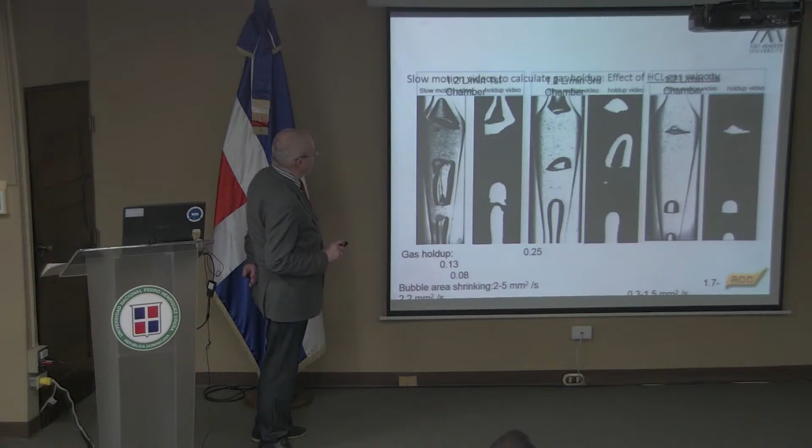Let's see. Here you can see, enjoy the show. Yeah. Bubbles are rising. One of my colleagues from Switzerland, who is more in classical reaction engineering, is not that fond of fluid dynamics. He told me, Tapio, it is not enough that bubbles are rising, but I think they must rise here because these hydrogen chloride bubbles must react with the component to make the product. Yeah. Can I do it now? All things are rising here. Hopefully I can go out from this.

Yes, good. So the Péclet numbers are clearly higher when we have this variable diameter reactor. That is the good point. And we could also see the preliminary fitting is quite good, and the high-speed camera gave us nice pictures. One can go very deeply here into the theory of fluid dynamics principally. But I think the most important thing is the intensification factor. We get much better results with this type of device compared with the classical one.

Then I go to something nice and simple and beautiful - it's the next step when we make this epichlorohydrin. Suyana Heredia, a lady from Ecuador and Spain, came to me and asked, Tapio, do you have some simple and nice project to do that I have time for?

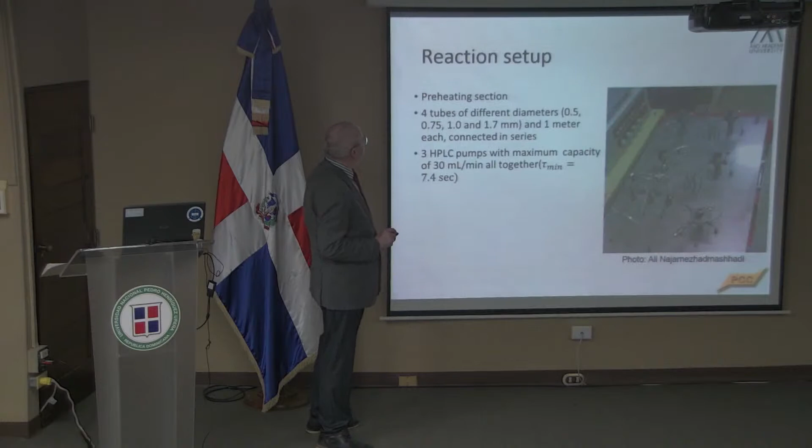There are different sampling valves after each coil, and temperature is measured in different places. This picture was taken by Ali Najarnezhadmashhadi, who came from Iran and made the residence time distribution studies here. In this picture you can see the coils which are in series, and the liquid is flowing through all of them. We have a better picture here.

Now we go further. We have this issue of glycerol, which I showed in the previous example, and then we made this chlorination, as I showed you, and then we make this epichlorohydrin. First step is reaction of this chlorinated product with the alkali. We get the intermediate which reacts, forming the final product. The global reaction is a simple one - simple on paper.

One can apply different theories. I can think that the first step is rapid because it's only a proton shift. Then I come to this rate equation, which actually was sufficient for the system. Quasi-steady state means that this intermediate is in steady state. These are details - we can go further, and it turned out that in both cases we can simplify it to a second order kinetics.

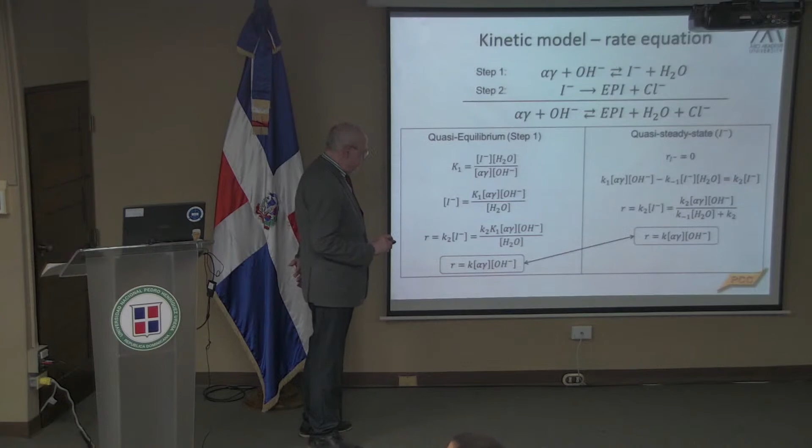So then it's like classical standard work in the sense of chemical kinetics. Analytics was a big challenge because we had to take offline analysis and quench the reaction by dilution and cooling. My colleagues were close to depression there, but I managed to keep the good spirit and say try tomorrow again with a little different recipe. And they tried and tried.

And it was fantastic - only quite few experiments, not very many, varying temperature and the ratio between the reacting components. That's it, the model is very simple: plug flow model, second order kinetics, and temperature dependence like Arrhenius law. And we have a lot of data because after each coil a sample was taken, so we had the profile of the component inside this millireactor system. This was minimized - experimental concentrations and those from this model.

Soon we see the results. Look, think what is the reaction time - 5 seconds, 10 seconds, 15 seconds. You can never do this in a batch reactor, because if you take a sample everything has already gone, everything has reacted. You must have a continuous reactor, because this is the residence time - residence time is volume divided by flow rate. So we can measure the kinetics of a very rapid reaction with high precision using this device.

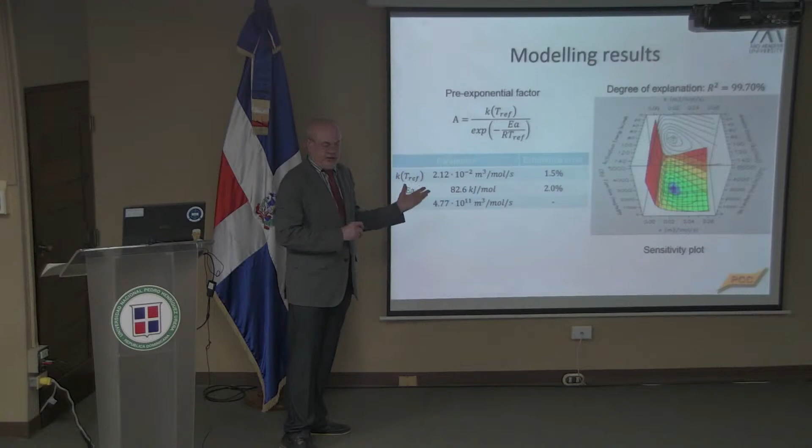So this is an example of how millireactors can be extremely efficient, and you don't need very sophisticated technique for them - you need coils, you need some valves, that's it. It was a success, and I was happy, and Sujana was happy. It was published in Chemical Engineering Science a few years ago.

I go to the last part now, microreactors. Why go to microreactors? What microreactors are - at least one inner dimension is in micrometer scale. High heat transfer rate possible, short diffusion resistance, short distance possible, and safety. But for me and our lab, in an academic environment, it's very efficient for investigation of kinetics and different catalysts.

Here we have the channels. I will show, after this marketing slide, some of the devices. Here are some disadvantages mentioned - cumbersome coating of the catalyst can be a disadvantage, but that can be solved either by hiring an internship student, PhD student, or using robotics. What else? Price of the material, of course, but I think 3D printing will put the price down because then we can more easily print different structures.

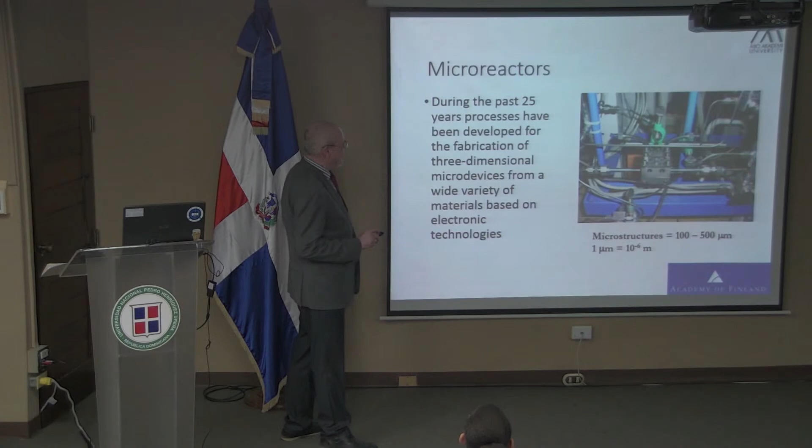Those with good eyes can see IMM, Institut für Mikrotechnik Mainz, from Germany. They provide this housing, and then they send an invoice. So you can use your money by buying these types of elements.

But you see, this is the principle. These channels must be made by some mechanical method, some etching, laser, different ways. I think when this microtechnology was started, it was very much the mechanical way they made these channels.

Then you must wash coat it with some anodic oxidation, something, put for example an alumina layer if needed, and then you impregnate with catalyst. So it has quite many steps, but the bottom line, we start from here, because this part has not really novelty in making the channels. There are better people who do it. The chemical and chemical engineering knowledge is here.

Here we have a simple example. Jose Hernandez put some plates here, and some silver salt solution to make a silver catalyst for ethylene oxide preparation. They are rotating there with the impeller, and one can play with the temperature, concentration, and impregnation time, and then you have your catalyst.

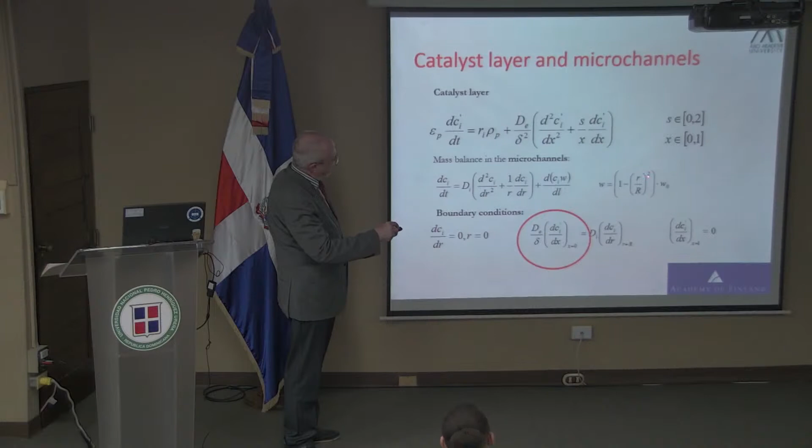Simplification was that we assumed a circular channel, so we have this distribution like in classical laminar flow. Okay, details are not that important.

We can see the interesting implementation and application. Sabrina Andrea Schmidt made a doctoral thesis on this topic, synthesis of some chemical intermediates in microreactors. The main part was this product, which you can make from hydrogen chloride and methanol. A very big amount of it is produced for Nordic countries, for cellulose derivatives—you can make methyl cellulose or ethyl cellulose. Then it's used in some other products, in making silicone, etc. You can Google what all the applications are.

This is a rather angry molecule, not very nice to transport on roads, trucks or railways. Better to make it in situ, on site, and use it directly, because the product is poisonous. The reaction is simple on paper - some ether is formed as a side product. The catalyst can simply be alumina, also doped with zinc chloride, but pure alumina works. It's a very rapid gas phase reaction.

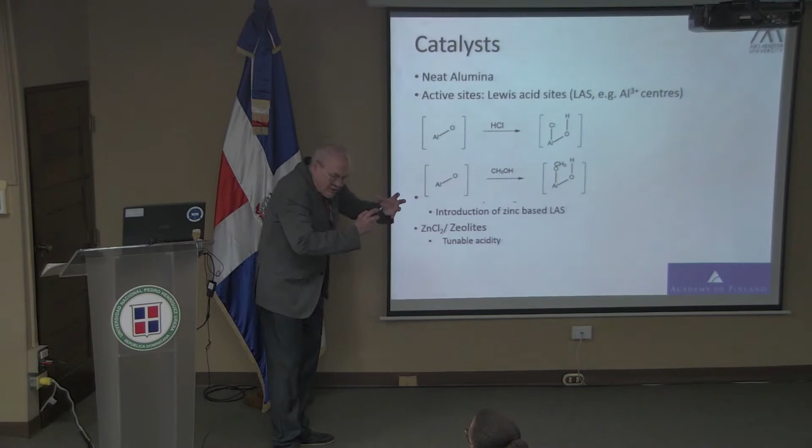But then what is the mechanism? HCl adsorbs on aluminium oxide, methanol adsorbs on them, and then they react with each other according to the principle of acid catalysis.

We screened some catalysts, but I think the result was that all these efforts were not that successful. Best was in any case the pure alumina. It was not the best in activity, but it was selective, very stable, and inexpensive. So the final part of the work was done with it.

It can go like that - sophisticated efforts do not give so much improvement, so we are left with the classical one. I think the method was this slurry method. We didn't need any addition of components - it was a slurry of aluminum oxide, some thermal surface treatment, etc. Then we can measure the morphology with a special type of microscopy.

We can see the layer thickness is only 15 micrometers, which is very good. It's a thin layer, and that makes the diffusion very efficient.

So I go now to the chemical engineering part of all this. We have three reactions here, bottom line - the main reaction, ether formation, but ether can react further, and we can rescue the product. So we must take all of this into account, and all of them are reversible. Even this one is reversible because it's not a million, it's 400, which means we get 95% conversion maximally.

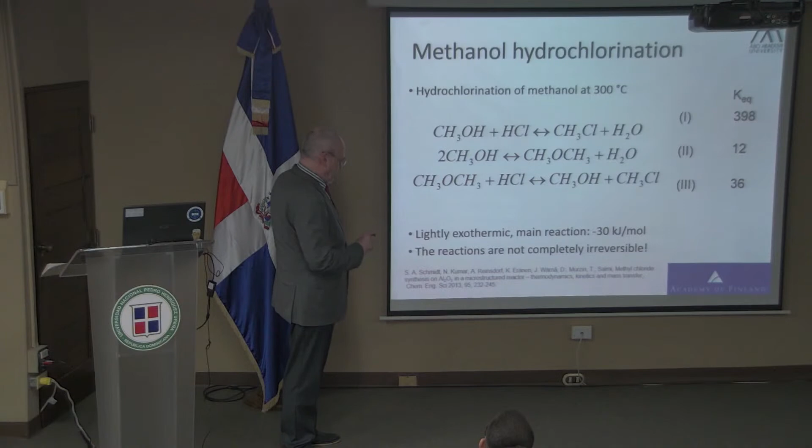And then some performance tests were made. I put 2 microreactors - or Sabrina put 2 microreactors - and then we come to the thermodynamic equilibrium even with one reactor less. Okay, good.

What is the residence time? I was so happy for the liquid phase reaction that it was a few seconds, but here for Sabrina, everything was over in 0.1 second. It's so rapid. So residence time was changed by changing the flow rate.

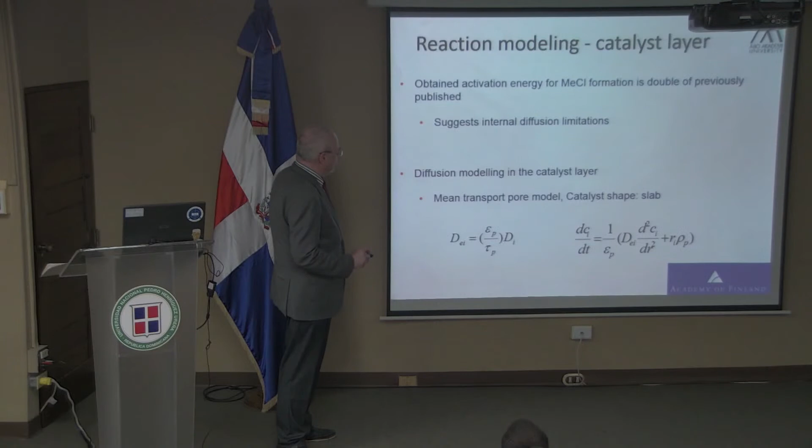And then one can see what happens if we have classical catalyst pellets. So we are again back to the reaction diffusion model for the pellet. With our reactor, we have a flat concentration profile of, let's say, methanol and HCl. But if we have a 0.5 millimeter particle, we have very heavy diffusional resistance. That means we can improve the effectiveness from 0.1 to more than 0.9, which means we have a 9 times smaller reactor.

So this is really process intensification, because it means a radical, revolutionary decrease in size compared to classical conventional technology. Furthermore, activation energies reported in previous literature were wrong because they were measured with particles of this size, and here you already see that the effectiveness is not high, it's less.

All this data which have been made on this particle size are affected by the diffusion in the pores. So this means that monoliths or microreactors are the only technologies which can provide the correct kinetics from the viewpoint of natural science, I would say, and that's quite an interesting aspect.

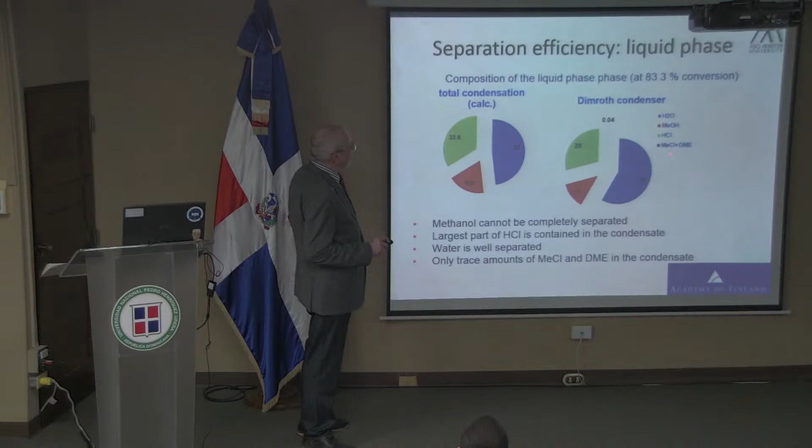What should have been done, of course, is to couple the microreactor not to a traditional condenser, but to a microcondenser. That would be the best high-tech in this case. In the liquid phase, you have a mixture of different components, but that must in any case be treated, I think, also in conventional technology. But then you have mainly components which are tractable.

So it suppresses several diffusion limitations in hydrochlorination, detailed kinetic models were developed, and separation of the product was very successful. So this is a great challenge. It's very multidisciplinary, comprising manufacturing, characterization, screening, mass and heat transfer, flow, but we must take the challenge and search for new applications.

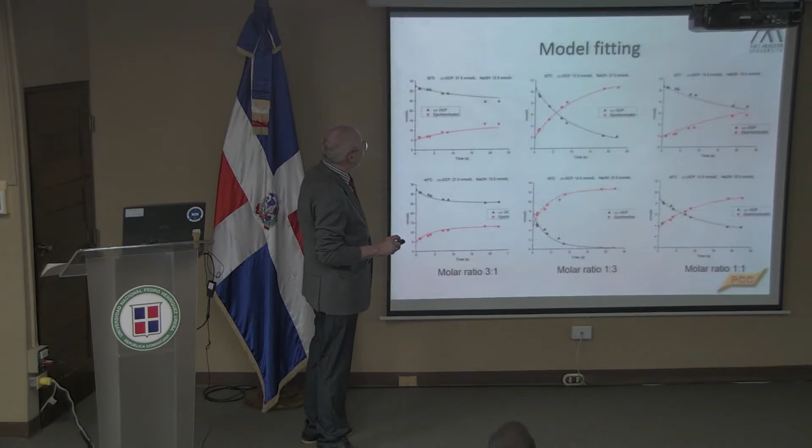Yeah, we should, but it was like on the first slides of the wash coating section. Metallic wash coating. Yeah, right there. The one after, that one more. Now, when we were in the monoliths, you told us that they were like hard to get, but actually not hard to get, but one can say that it is a little bit of a drawback when you make the classical attempts. Yeah, it was more like a general culture question.

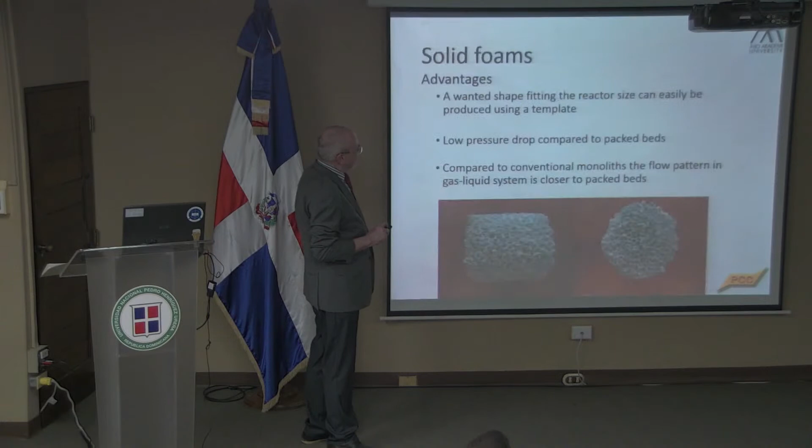There you have a thicker layer, and sometimes those who make the monoliths are complaining that they don't have the thickness the same everywhere, which would be the ideal case. I think it's simply that when you put the wash coat slurry, it has the tendency to go to the corner a little bit more. But now I'm not fully updated. It can be that these days it's already better. But typically, what we can see, yeah, that's the one, this is not very good. But I think it's difficult to do so much, perhaps. Yeah, it's a matter of the geometry of the thing.

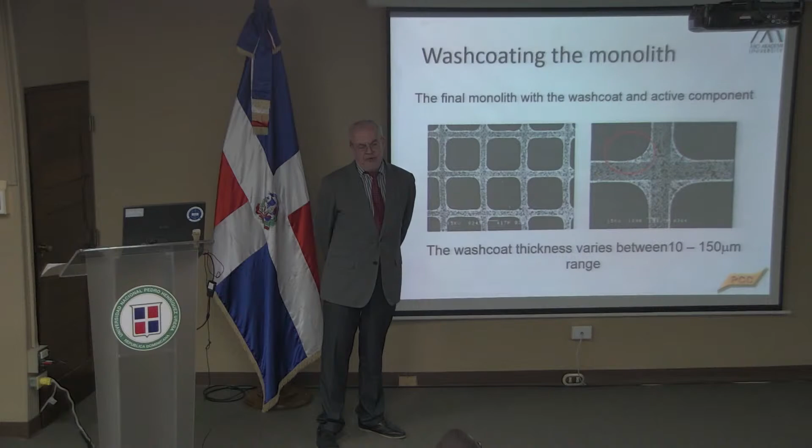One trivial thing is, of course, the optimism that these chemical factories take less of the land. But also if we get more selective and more pure processes, then we have less of these cleaning problems of the waste and less of separation problems and so on. So actually, the chemical process should be as small as possible and as clean as possible. It also can be in the energy consumption for the process. If you must do a cumbersome separation by distillation, for example, it consumes more energy. But if the separation goes nicely, like I have with my methyl chloride, then it's rather inexpensive. So the effects are both environmental and economic.

Okay. And to sum up, what is the greatest challenge you have faced in three-phase catalyst modeling? Modeling has always been a challenge itself. I think the point is really these many parameters, because almost every year they organize a discussion between the Nobel Prize winners. And once they were discussing why computing has not made the big revolution in natural sciences. And the conclusion was the lack of parameters for the models, because if we must estimate everything simultaneously, we are rather uncertain.

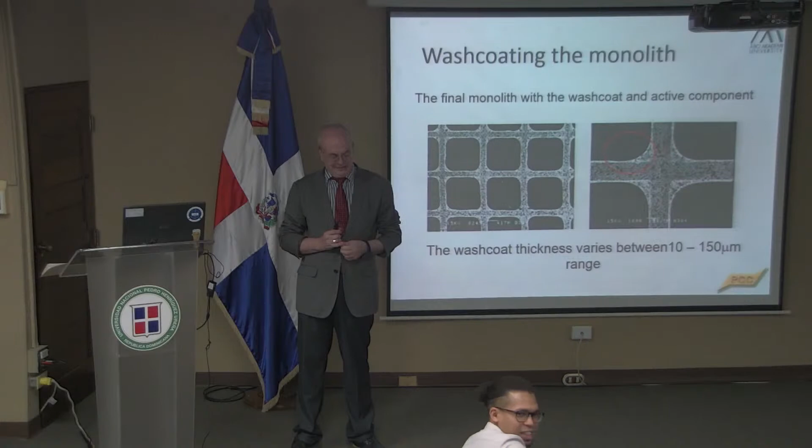Well, we were talking here that we both had the same question Ramon had, and he actually asked it for us. So let's say you answered like three questions in one. Oh, good. Mala suerte. No, I have a question myself, but a little bit more like.

Lower yields. In most cases, yeah. Yeah, and how is it like? How do we deal with diffusion if we go, for example, from lab scale to industrial scale reactor? How do we manage this problem?

No, Jan, you see, the point is that I could have had one good slide, because we have these small particles like liquid powder, and then we can have bigger ones in a tube reactor. Yes, and then we have this diffusion resistance when we have these bigger particles. So you cannot avoid it, because if you make these particles too small, then you have such a pressure drop that you cannot run the tube reactor anymore.

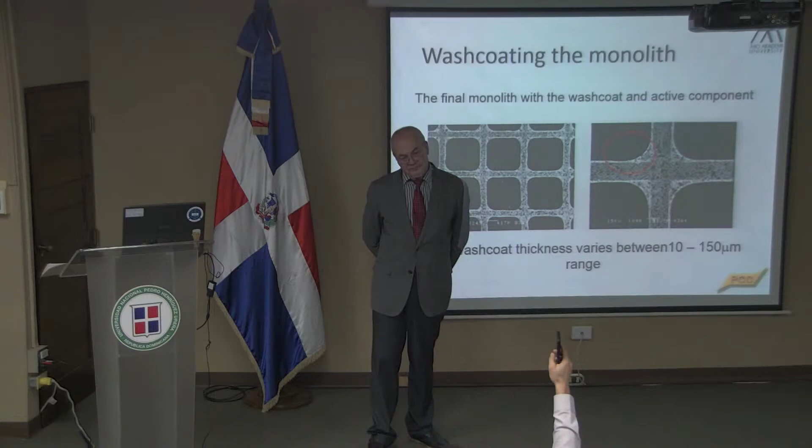Therefore, these solid foams and monoliths and microreactors are so much investigated. Then we know also that diffusion goes up the higher the scale you go. In a very small reactor, you have very little diffusion because you can have a powder there. But then you go to a pilot plant, then you go to the industrial scale. How do we correlate the difference in reactivity and diffusion when we go up?

With these marvelous partial differential equations, we calculate different diameters and the effect, yeah. But I think industry is typically not doing it somehow, even if this theory of reaction and diffusion dates back to the year 1939 or something like that. But I think nowadays when we have effective computers, we can simulate also complex systems, and not only first order reactions, but we can even simulate the diffusion in systems where we have biomass mixtures.

Thank you. Then one more question, because I was talking a lot about heterogeneous catalysis, but in the hydrochlorination you use homogeneous catalysis. If we were to switch to heterogeneous catalysis, which suitable catalyst could we choose?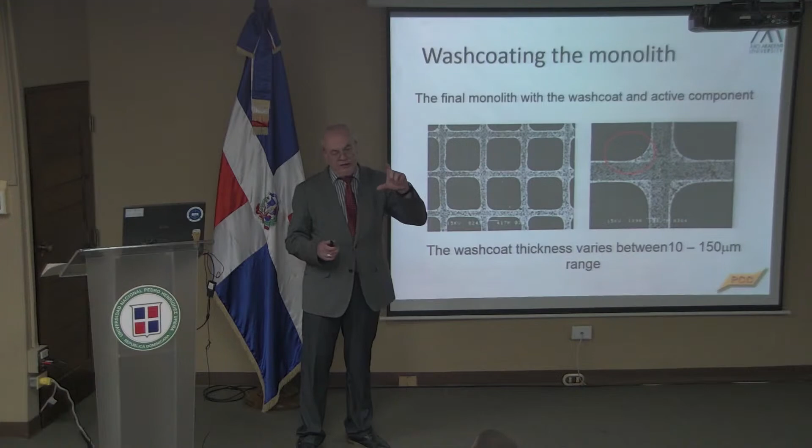That is a good question, but I must confess the truth. You see, principally I think you need a weak carboxylic acid to make the ester. So one could think that you would immobilize a weak carboxylic acid. Perhaps it's not practical to immobilize acetic acid, but it works even with longer carboxylic acids fixed to solid material. We tried to do it, but it failed. Yeah, I was there. I told the truth.

So you see that you can go from a homogeneous system to a heterogeneous system. It would be nice, because here in this hydrochlorination we always have the homogeneous catalyst which somehow must be separated. Even if it's not that component, you cannot leave it in the product. Maybe one day we get some acidic catalyst that doesn't need immobilization techniques.

Yeah. Are you eager to take part in that? I have my project already. But you are a postdoc, so one project is not enough.

Yeah, but I think that is an idea which is evident. Actually, our colleague from Umeå provided this catalyst, but it didn't work properly. That's it. Thank you.